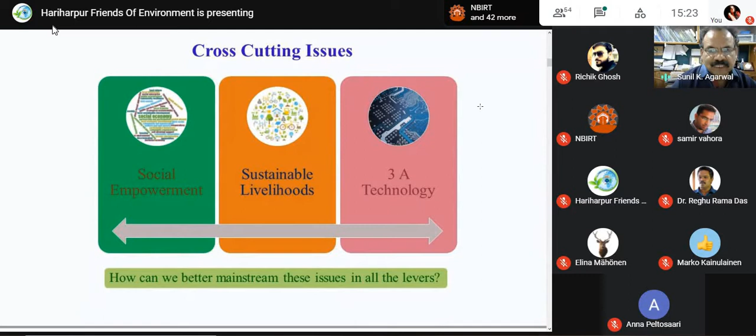These are the cross-cutting issues when we talk about social development or impact: livelihood, social empowerment, and 3A technology. When we talk about technology, we believe in appropriateness, affordability, and adaptability at the user or community level. We have to strike a proper balance among these three cross-cutting issues, and that is the purpose of the Science and Society program of the Department of Science and Technology, where we look at these cross-cutting issues in each and every project to benefit and empower the community at large through technology interventions.

So these initiatives are being taken under the particular scheme, the technological advancement for rural areas. This is a grant provided in a phased manner over 5 years, and they work to deliver need-based and scalable technologies at the grassroots level, focusing on better quality of life through action research, which may lead to social enterprise—not a pure enterprise, but a mini or micro kind of social enterprise, which can lead to income as well as improvement in quality of life.

And we have at present 26 such organizations across the country working under this program.

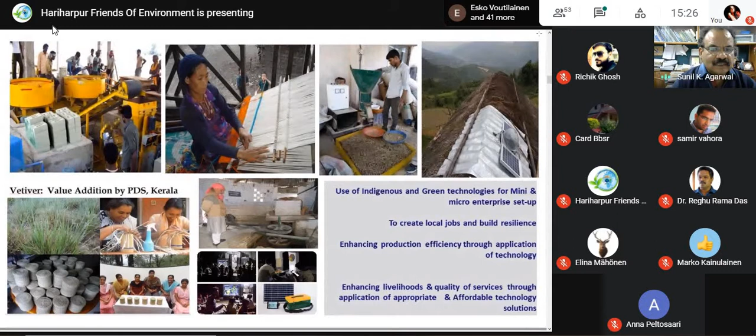On the right side you can see a micro solar dome installed in Manipur, and in the center a water mill from HESCO, who are working on water power and multi-purpose use of the water mill. At the bottom center is Barefoot College, based in Tilonia, Rajasthan—they have come out with a solar power Edu box, used not just in the country but outside as well. They have a network of 90 schools in rural areas where dropout students are educated using such devices.

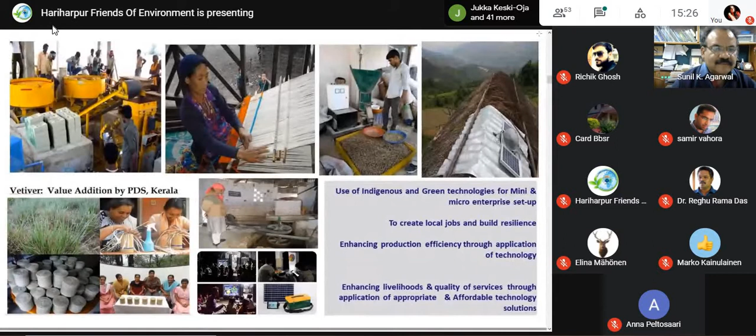Our interventions through this program are need-based technological solutions to address local challenges. These are some of the interventions carried out through a network of these core-supported organizations in the energy sector, biotechnology field, and other sectors as well.

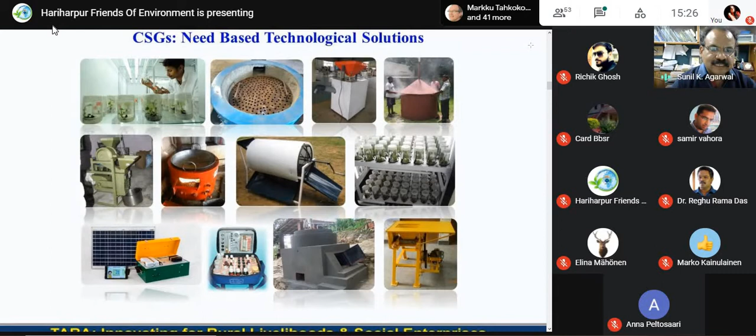In this slide, we have captured some technologies and products designed and developed by this network of core-supported organizations. You can find some related to energy—solar water heating system for mountain areas by Himalayan Research Group in Shimla, and solar tunnel by SPRERI based in Gujarat. We also have groups working on biogas systems at the community level, ARTI Pune, and another group working in Kanyakumari, Vivekananda Kendra.

These are the interventions which are in demand and which have evolved through the emerging need at the community level.

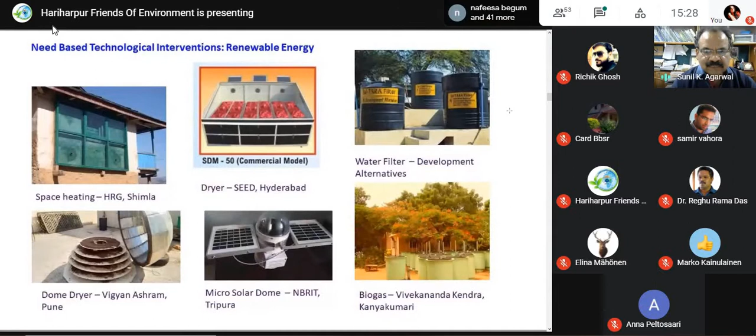This slide shows renewable energy interventions, particularly for space heating by HRG Shimla, and a dryer developed by SEED Hyderabad. This group in Hyderabad has developed varieties of dryers of different capacities for drying fruit pulp, making value-added products, and also processing minor forest produce into powder and even syrup. At the bottom is the dome dryer designed and developed by Vigyan Ashram, a core group based in Pune, and the biogas system from Vivekananda Kendra, Kanyakumari, mentioned earlier.

These are other interventions carried out by these groups. One group based in Bangalore, TIDE Bangalore, has come out with energy efficient cooking devices. And this is a micro solar dome designed and developed by NBIRT. These are efforts and initiatives which are need-based, addressing problems at the community level in remote parts of the country.

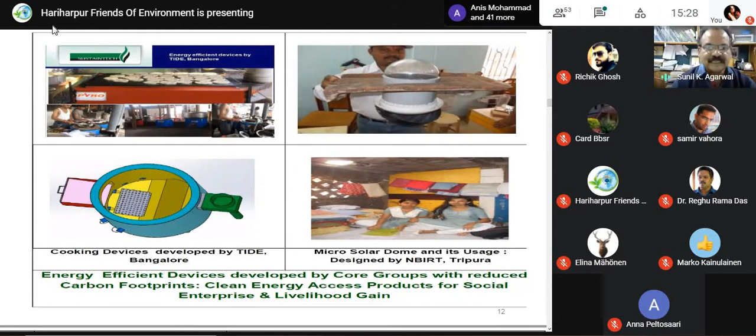I have also tried to capture some of these groups working particularly in clean energy solutions. On the left side are interventions they have done, and on the right side are innovative core groups working on renewable energy technologies. These interventions are also captured in our technology compendium, which we have put on our dsttara.in website, where you can source such technology interventions and the agencies who have designed and developed such renewable energy related products and technologies.

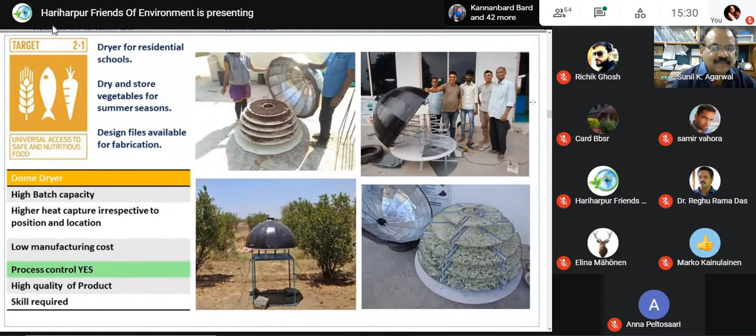This is the detail about the dome dryer developed by Vigyan Ashram. The beauty is that in a small space, the capacity is large, and this is mostly used for leafy vegetables and some herbal products to dry and make powder. These are interventions engineering-designed using the Fab Lab facility which Vigyan Ashram has, and such interventions are really in demand and being scaled further.

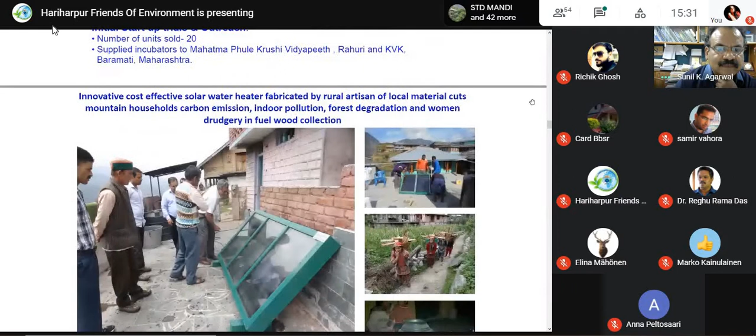In the same way, this is a very affordable product developed by the Himalayan Research Group in Himachal Pradesh, addressing the problem shown and providing income or employment to local artisans or fabricators in designing this double wall frame. It helps reduce indoor pollution, as shown on the right side. Traditionally they use fuel wood, with significant carbon footprint data. This eco-friendly device developed by HRG helps not only with water heating but also space heating, and has been captured across 6 districts as well as in the Ladakh region.

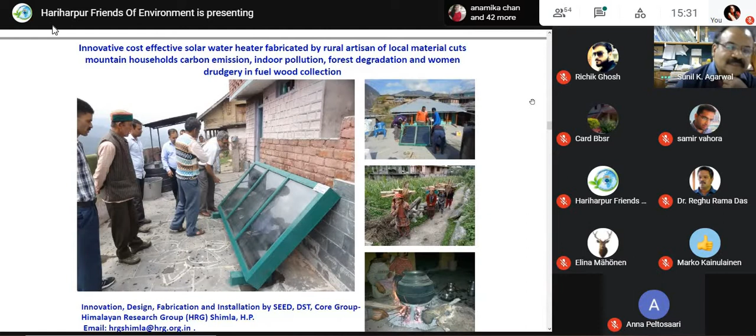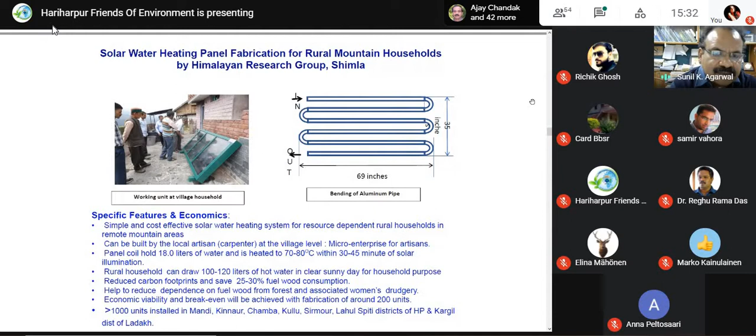These are the specific designs showing how it benefits water heating while reducing fuel wood consumption and women's drudgery. More than 1,000 units have been installed by HRG across different parts of Himachal Pradesh, and the state government is supporting this initiative. They received the State Innovation Award for this innovative work, which Mr. Risto also mentioned regarding solar waste innovation. This is one example in this process.

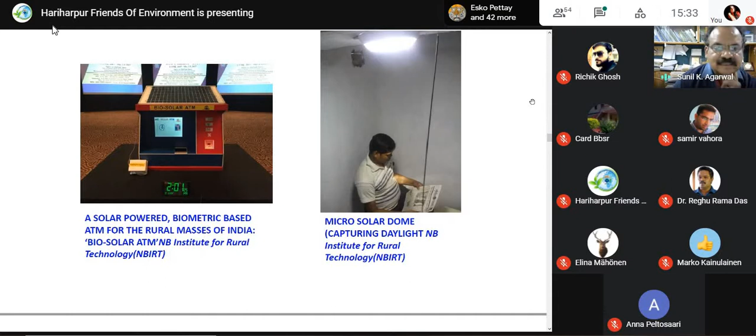There are other interventions from the NB Institute of Rural Technology, where Dr. Gaun Chaudhary tries to innovate and bring out one or two products each year. This is a solar powered biometric ATM, field tested and supported by DST, and now we are looking to get support from banking institutions for large scale application and adoption in other rural areas.

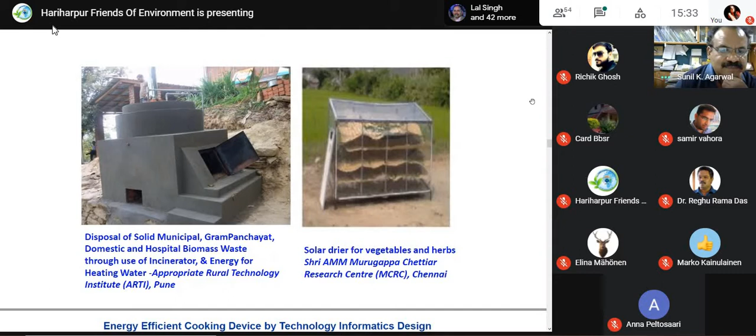What Mr. Risto was talking about, the energy efficient cooking devices - one group based in Bangalore is working on such devices and has come out with calculations for devices of different scales used in dhabas and restaurants. This has shown potential not only in reducing carbon footprints but also reducing drudgery involved in the process, along with clean energy solutions, in collaboration with IISc Bangalore. This is the technology evolution process involving knowledge institutions as well as science-based volunteer organizations, which we call core support organizations.

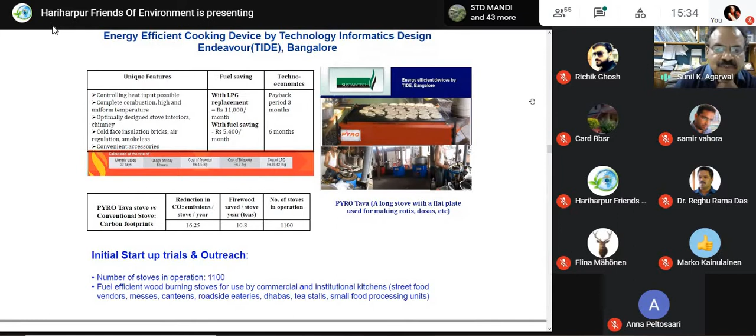So these are the products which have been designed and developed by TIDE Bangalore.

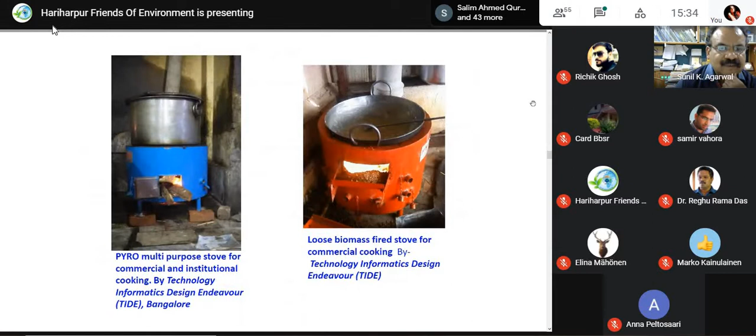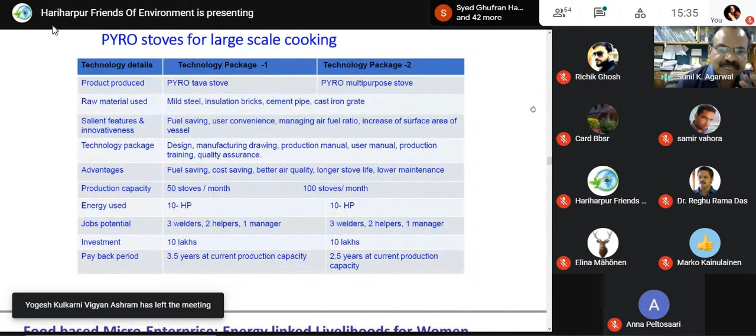These are some of the details of the packages in terms of investment, payback period, and advantage in fuel saving, cost saving, better air quality, and other factors like what raw material is being used. So these are some of the details which we have tried to capture for such technology products.

Besides such interventions, some groups, these core groups, have worked on the creation of micro enterprises, food-based enterprises, and have come out with varieties of nutrient fruit bars using the solar dryer by Seed Hyderabad. Another group, HESCO in Dehradun, has worked on mountain produce using the same dryer. So there is a technology flow from one organization to another, and they are working on local produce, with slight changes as per the climatic condition to control the inner environment for humidity or temperature.

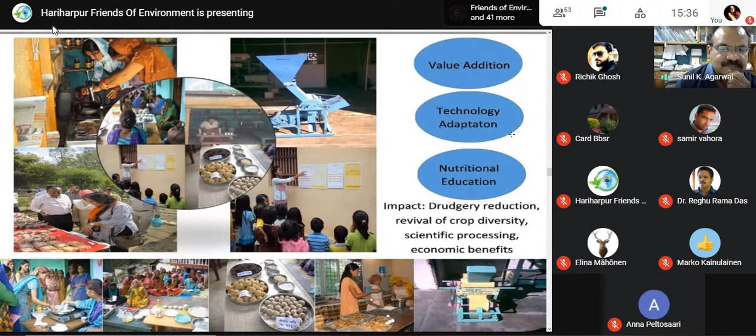So this is another case of Seed Hyderabad, where you can see the complete technology package, with details about the job potential and payback period of around 4 to 5 years. 200 plus micro enterprises have been created through such products, which is being promoted now by Seed Hyderabad, and they are really working on scaling such initiatives and efforts at the village level.

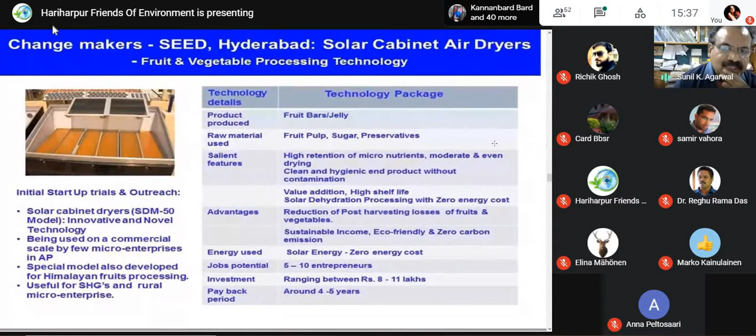So these are some of the details of these products, and they also have technology know-how, not just in India but outside India as well.

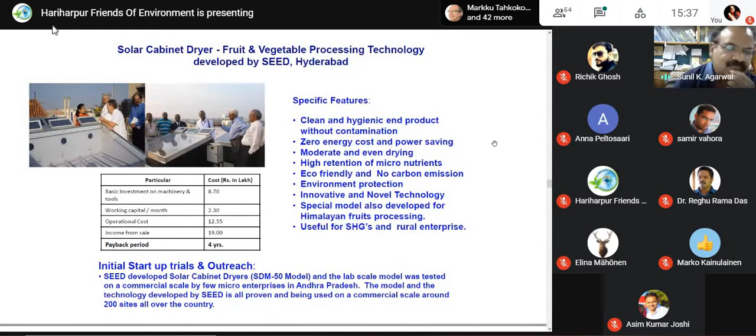Besides, there is some intervention carried out under the mountain program. We have a specific program, technology intervention in mountain ecosystem, and this is the product from YS Parmar University. They have designed and developed an indirect solar dryer for drying fruits and vegetables, specific to mountain regions, trying to control the conditions within these products including humidity and airflow.

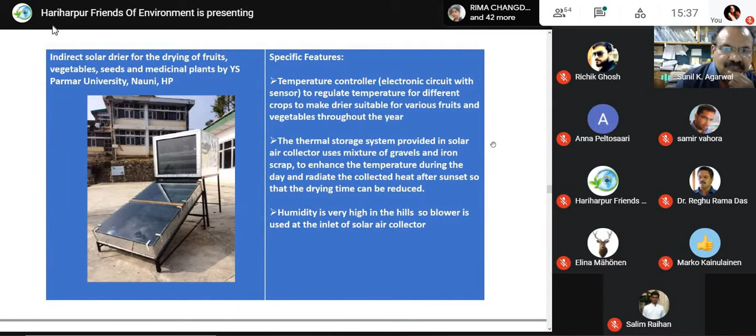So these are some of the specific features while designing this type of dryer for use in mountain areas, and it is easy to fabricate by local artisans. That is the real importance, how we can revive the artisans and their livelihoods.

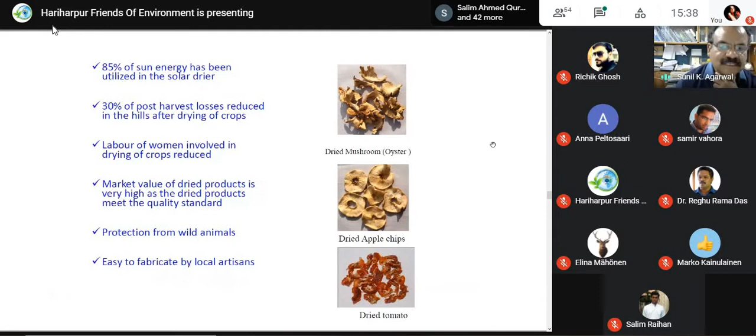There is another group, Development Alternatives, based in Delhi, with working areas in Bundelkhand and other parts of the country. They have also come out with green technological solutions in building material, paper recycling, and creating enterprises at the small and micro level.

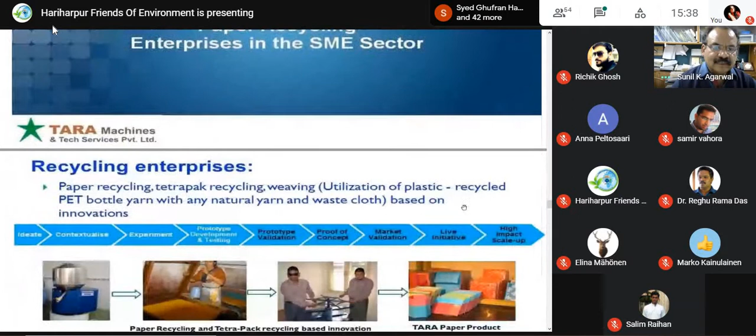And this is what they have come up with, a technological solution as recycling enterprises from idea to experiment. That is what all core groups are working on with the same principle: prototype development, field testing, proof of concept, market validation, and then high impact scaling up efforts.

They have designed and developed a paper recycling unit where they are using the solar waste drying system and making varieties of value-added products of different types and for different purposes.

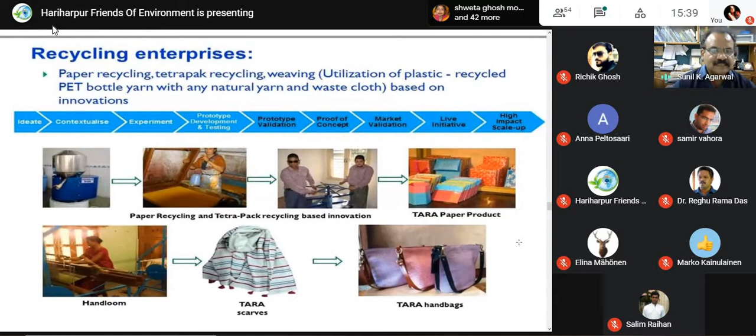And this is the detail about these packages, paper recycling and waste to weave. Two packages are there which we have been able to develop, and the payback period is given as around 2 to 3 years.

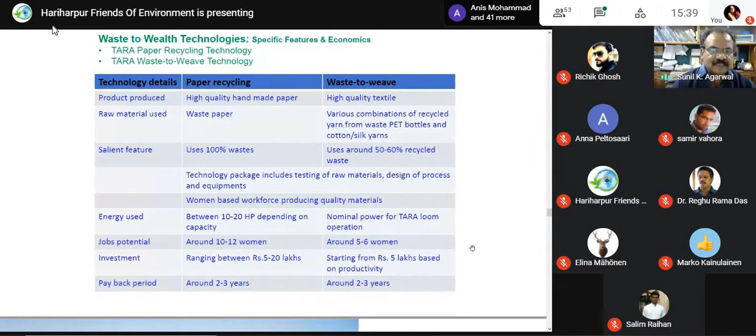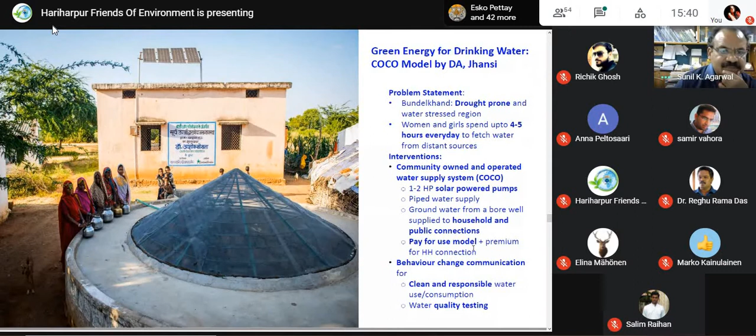And this is the complete working mechanism of such models for sustainable water services, with maintenance of the system by engaging the youth and women in the village system.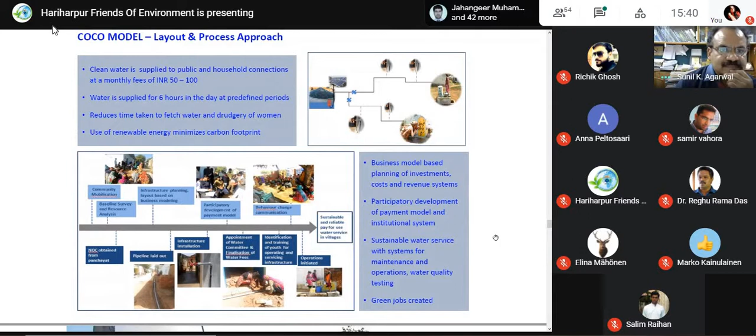So this is the kind of impact: 550 plus families are being benefited, engaging women and youth in income generation activities, as they are also involved in maintenance and repair of such systems, based on a payment system. This is really helping enhance the social impact and outreach of such technological interventions, developed and evolved by science-based volunteer organizations.

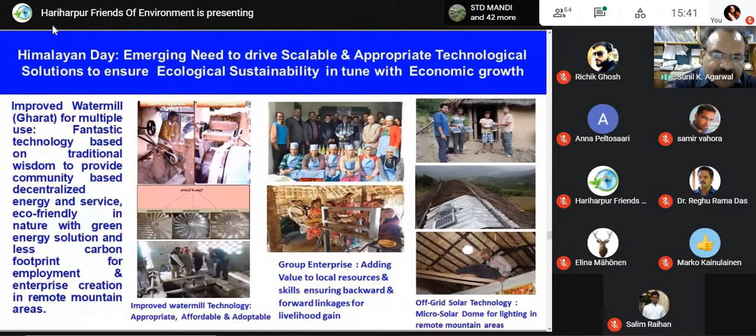This is about Bundelkhand, which does not have good quality of water, and we have other areas of intervention in the mountain area. These are initiatives in terms of water mills, designed and developed by one of the groups, HFOE, working on a variety of turbines. Another group, NVRT, has worked on the micro solar dome, which is being promoted and field tested in varied climatic conditions involving these core groups. That's the support DST provided to NVRT and other core groups so it is really catching up.

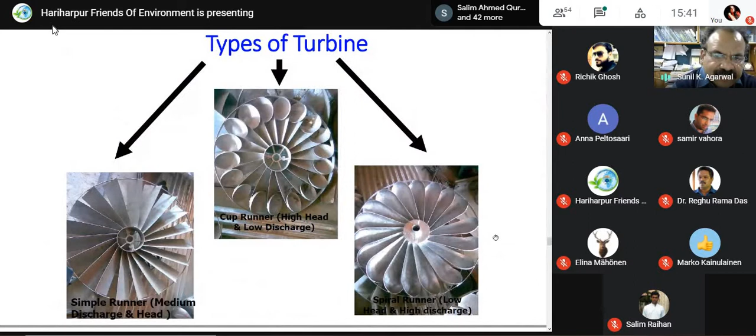And these are different types of turbines which have been designed and tested by HFOE Dehradun.

So how are we going to scale up such efforts at our level? We have one program around protected areas. These technologies - micro solar dome, water mill, or solar dryer - are being promoted through other programs around protected areas, engaging resource-dependent communities to provide them alternative livelihoods and reduce their dependency on forest resources for fuel wood or other purposes.

These are some of the interventions made through these programs, connecting the dots. Whatever interventions or technology products come from the core groups are being used in other programs for scaling up or benefiting the community at large in remote and rural areas, particularly around protected areas, of which we have more than 700 across the country.

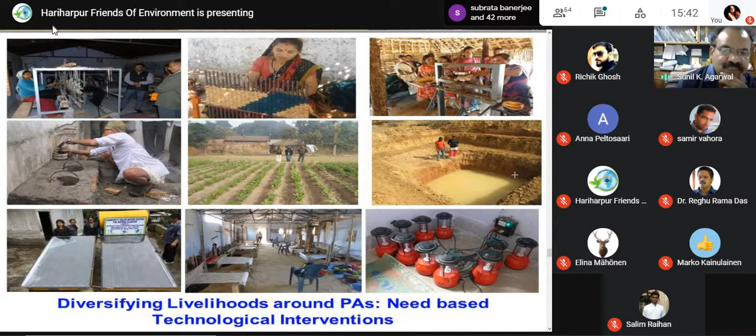So these are the social and environmental impacts through such initiatives. You can see reduced drudgery and reduced pressure on natural resources, contributing directly or indirectly towards climate change adaptation, and also addressing human-wildlife conflict. These are the joint modes of governance from understanding to action research.

In terms of technologies, this is the total impact of the program for the last 3 years, at the grassroots level, also addressing specific UN SDGs - these are SDG 1, 2, 3, 4, 6, 8, 10, and 13 for climate actions, and clean energy solutions, that is SDG 7 I think.

So this is the national footprint of these core groups. They believe in working collectively and also with the community, and they also act as a think tank at the local level, doing innovations to address local problems and challenges.

So this is the compendium which has been brought out, and you can see on the right side, the website dsttara.in. We have captured some of the technologies related to energy, agriculture, water, or digital technologies, which have been showcased in this compendium, available on dsttara.in. This website is maintained by one of the core groups, Vigyan Ashram, based in Pune. You can find details on the website.

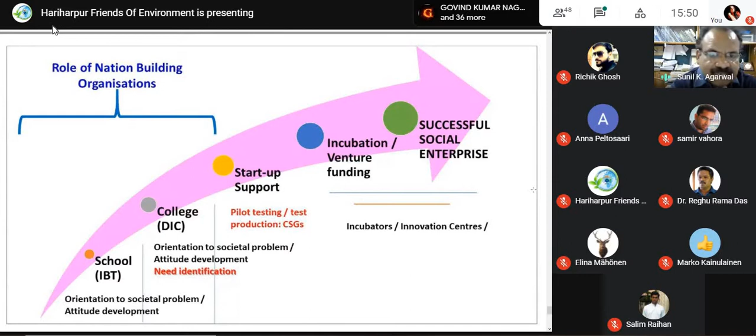The focus now is village-centric rather than city-centric growth, because India lives in the villages. We need to nurture the rural and social entrepreneurship ecosystem, and technology should move at speed with scale and sustainability, requiring collective action. That's what we're trying in this process. NVRT and InSIC are also trying for collective action, involving R&D labs and field-based agencies like the core groups and the community, for impact at the bottom of the pyramid.

Ultimately, what we look at is the impact and the smiles on the faces of the communities. This is one of the photographs we captured from the mountain areas in Kullu, showing the technology users involved in the process run by WWF India. This is, from our side at DST, to share some of the experiences we have in technological innovations at the grassroots level. So thank you once again.

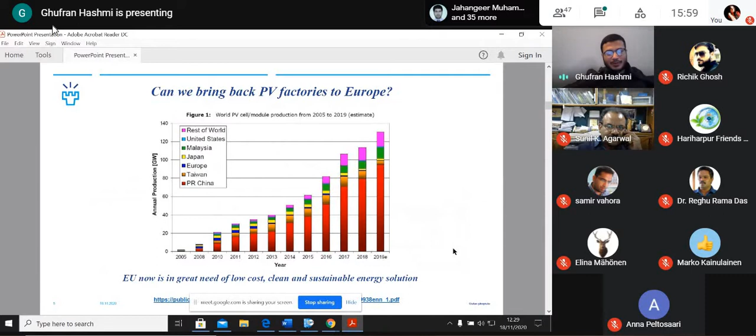When I posted this on LinkedIn, because I count that as a more effective way of getting citations rather than publishing an article and waiting until people cite it, this was the quickest way. It received massive attention, and almost 100K views were achieved in a few days, for a reason I'm going to explain, because a lot of people are working on perovskites.

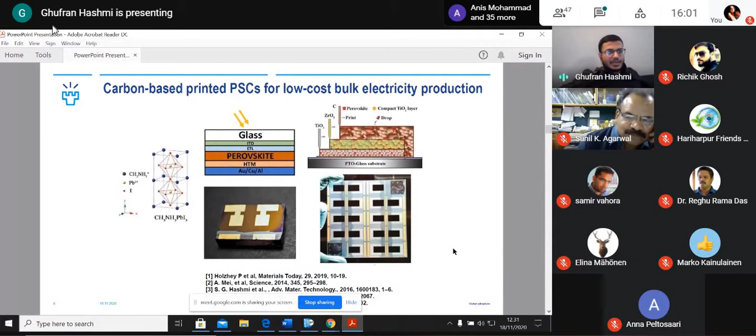However, we all know that perovskite solar cells can be fabricated into many configurations. There is an interesting configuration which I worked on dedicatedly, and I have been involved in developing it. Today I would like to share some thoughts about it, and the data which we have published. First, you take a glass substrate, and then you coat all these active materials by scalable methods, and then you can really have a device.

This first work related to this structure was that you just coat the electron transporting layer, then an insulating zirconia or aluminum oxide layer. Then you can print the abundantly available carbon nanoparticle based layer, which works as the hole transporting or hole collecting layer. Then from the top you infiltrate the perovskite precursor that goes through the pores, and when you heat up the substrate, it crystallizes.

But what was happening before my work was that people were manually infiltrating the perovskite precursor ink, and that was creating a huge problem, because in order to develop any new nanotechnology, you have to make sure you produce it with a highly reliable process control, meaning every active layer you deposit should be reproducible. For example, if you're adopting scalable methods such as slot die coating, inkjetting, or even screen printing, that allows the same amount of paste or liquid ink dispensation, so that in the end, when you fabricate any kind of module or batch of a module, it should give a reproducible result.

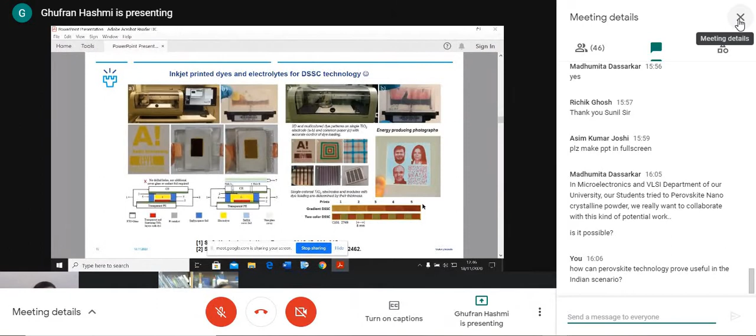Similarly, you can see these colors - this dye sensitization process, after coating the titania layer on the FTO glass, you directly dip it in the dye solution. Anybody working in this field knows what I mean. Then you grow a monolayer of this dye on the titania layer through the anchoring groups, so you cannot introduce multiple dyes.

Because in the larger spectrum, normal inkjet printers which connect with the computer have CMYK and RGB kind of cartridges. The active motivation is shown on the right side - there are 3 photographs, one of me and two of the co-authors. It is in only red color, and it's an active solar cell.

The motivation is, if we can introduce multiple dyes, can we generate something similar to digital printing? Can you produce a photograph as a function of a solar cell? That was the motivation.

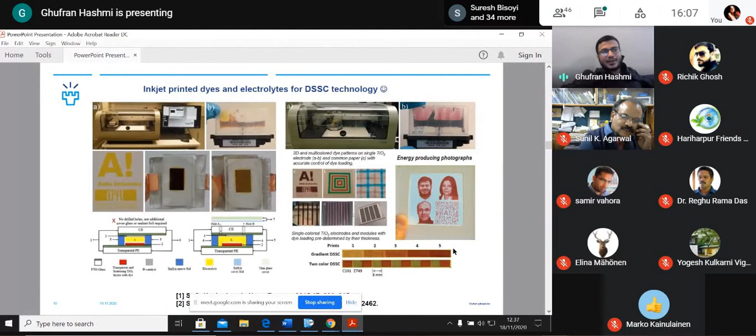We successfully developed a proof of concept, and that was the motivation to adopt this inkjet infiltration or printing of the perovskite. That went very successfully, and we were able to show a very tunable performance by controlling the amount of the lead halide perovskite precursor.

Not only did it improve performance systematically, but we also achieved an almost hysteresis-free JV curve, which is one of the major challenges in the perovskite solar cell field. So that was successfully established.

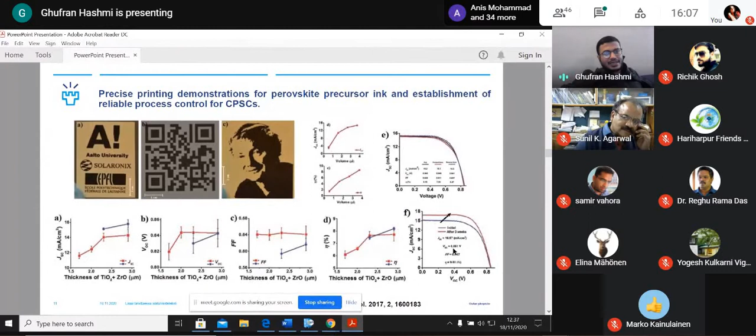More impressively, when we exposed the devices to thermal plus full sunlight soaking tests, without any encapsulation, the devices remained pretty stable. This was a few years ago, when everybody was trying to stabilize perovskite solar cells, so that was a very impressive result. This article remained highly downloaded for about 1 to 3 years.

And this work is also patented with a US patent application.

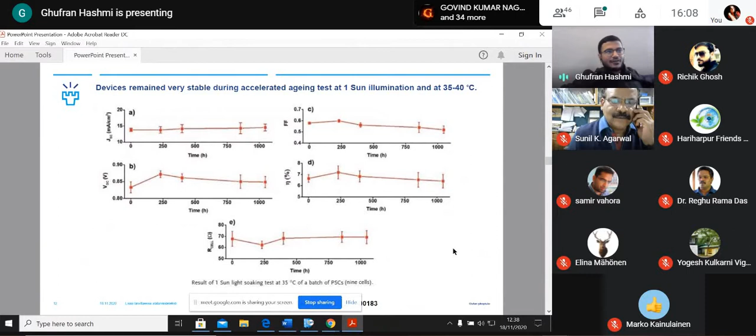With these impressive results, we moved to another stressful condition. We took the same devices, again without encapsulating them, and exposed them to very high UV stimulation, because organic photovoltaic technologies often suffer badly with the UV element in the sun's spectrum. One of the challenges is that every new technology, including this perovskite technology, should be very stable under UV light.

So without encapsulation, we again exposed the devices in a chamber where we installed very heavy UV, crossing 1.5 sun illumination. If you see the link in the article, you can go through what the conditions were.

When we exposed the devices for long-term stability testing, they remained stable under this stressful condition for 250 hours. After that, you can see a degradation in the short circuit current density.

You can see how these perovskite crystals appear black or dark brown. When they degrade, lead iodide formation occurs, so then you can see a yellow kind of color. That indicated that on this non-active area, and later on even in the active area, the moisture had penetrated and degraded the performance.

But even the devices remained very stable for 250 hours, and that is a very good result in this preliminary step. So how we planned that, you can see on the right, the JV curve was degraded for the same device when we measured it after maybe 6 weeks, or more than 700 hours. But it's still the results were promising.

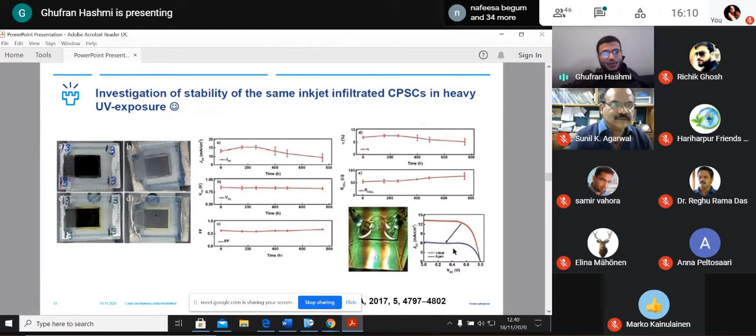So what we decided was to retard somehow this rate of degradation. What did we do? We simply took this normal epoxy available in the market, and we just doctor bladed this epoxy to cover all of this active area. And what happened then, we re-simulated the test, and we exposed the device in the same kind of conditions.

So as you can see here, for more than 6 weeks, it is a kind of standard test that is adopted from the advices or the consensus established for these organic photovoltaic technology testings. What happened is that the devices were not degraded up to this 6-week test. So it actually passed. This is one of the most stable research results in this field of perovskite solar cell technology.

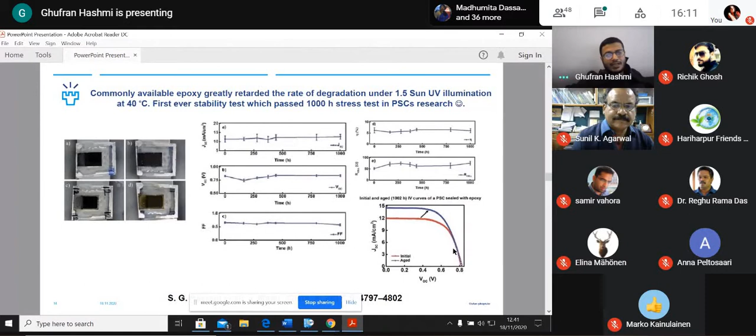And then what happened is that although you can see in this figure D the sign of the degradation was there, it was not reaching the active area. That's why not only did the devices remain stable, but the performance was also slightly improved. You can see the details given in this reference that is published.

So all these two preliminary stability tests were very motivating for us, and gave us extreme excitement. The same chamber was able to create a thermo-humid environment, because if somebody is following this field of perovskite, they all know that perovskite degrades rapidly in humidity and moist conditions. But our curiosity based upon these two brilliant testings led us to test the same device structure in this humidity-assisted thermal treatment.

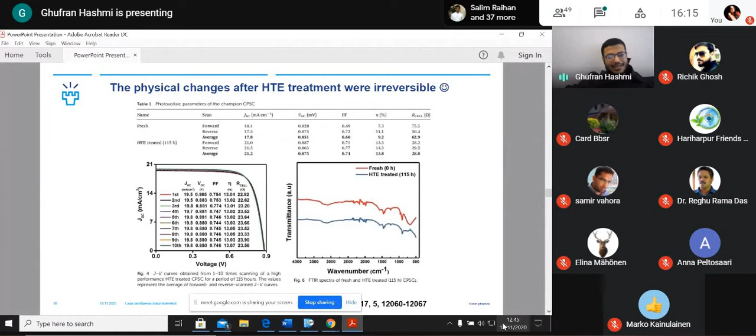It surprised me — how is it possible? So the first thing we normally do for this kind of crystal growth is the XRD measurement.

As a simple test, like in my previous slide — sorry, this one, I wanted to show this one. So what did I do on this surface of the carbon? I simply did a 4-probe measurement test to check what happened, because this is a nanoparticle-based layer.

So it happens that the sheet resistance could be changed. What did I do? I made a 4-probe measurement test where, without infiltration of the perovskite precursor, we measured the sheet resistance of this conductive layer at around 14 to 15 ohms per square. After infiltration, after crystallization of the perovskite, it reduced to around 10 ohms per square. That's understandable because it improved the interparticle connectivity. Then after the heat treatment, it was further reduced to around 8.5 to 9 ohms per square.

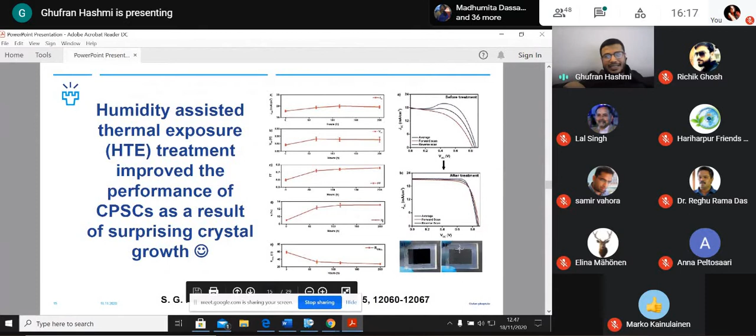But luckily, as I mentioned, a crystal came out at that edge, which gave me the idea to take some SEM images. You can see here the images of that edge. When the perovskite initially crystallized, it formed small chunks. Over the period of humidity exposure, they started merging together and forming these larger crystals.

So we were shocked, how is this happening? What we realized is that this carbon is hydrophobic by nature, so it repels the moisture created in this chamber. However, because it's a porous structure, it allows steam to go through and kind of kiss the perovskite crystals.

And what happens is, from the outer boundary, before fully degrading, they start fusing together with the neighboring crystal. And that's why they were turning into large crystals.

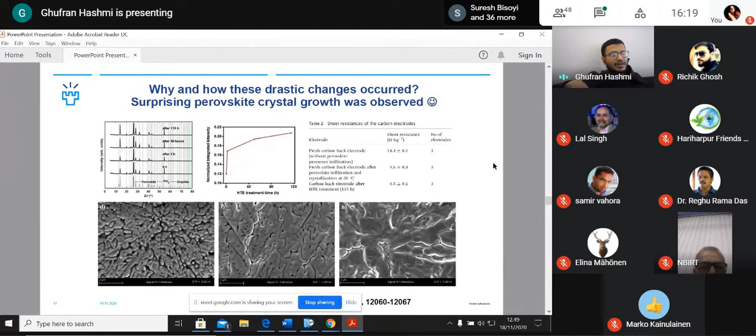This has given us a new discovery, because in all other structures you cannot expose the devices directly since they are just 1 micron thin, like the preliminary slides I showed. But in this structure, it gives us the liberty that this carbon is naturally hydrophobic, so it repels moisture, and you can keep the devices in high humidity.

When we tested the devices again for a long-term stability test, there was no performance degradation. That gives complete endorsement that these physical changes are not reversible, they are permanent. So this is a new way I figured out for the crystal growth, and that can lead to further improvements.

What was missing in the previous literature is that people mostly report four parameters: short circuit current density, VOC, fill factor, and efficiency. However, there is another parameter called cell resistance, because my structure is about 15 times thicker than the traditional one.

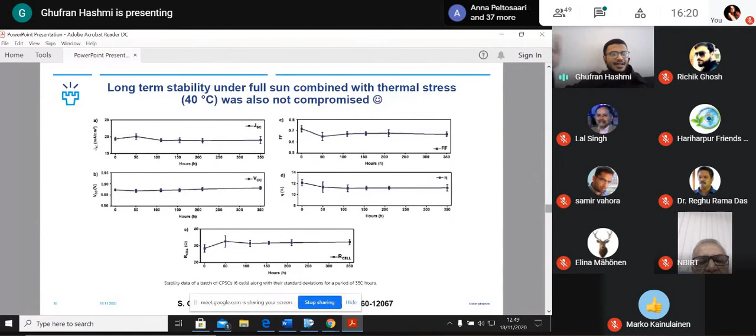So without going into the science, the principal characteristic it offers is high cell resistance. One of the challenges was to reduce the overall cell resistance. And how to reduce it?

This physical crystal growth improves the structure and interface, and now it is possible to reduce the cell resistance by up to 50 times, which is an impressive thing we achieved.

Since my last talk at InSIC, we have scaled up this technology successfully over a 40 by 40 glass substrate. You can see the device performance on a 20 by 20 square centimeter substrate, with an active area of more than 230 square centimeters. These are just some initial trials.

You can see a hysteresis-free device with a very impressive 7% conversion efficiency. And you can create a serially connected device to achieve nearly 11 volts, which is huge, because all these electronics these days operate on 5 volts.

You can see an amazing thing, that it's a very low cost production process. So the idea is, based on the spirit of promoting energy research in rural areas, to establish a low cost photovoltaic factory as a role model.

A lot of companies got excited within Finland, so they have been collaborating enormously, providing their facilities when needed. We have successfully filed many patent applications around this technology, and we are trying to convert it into a reliable product.

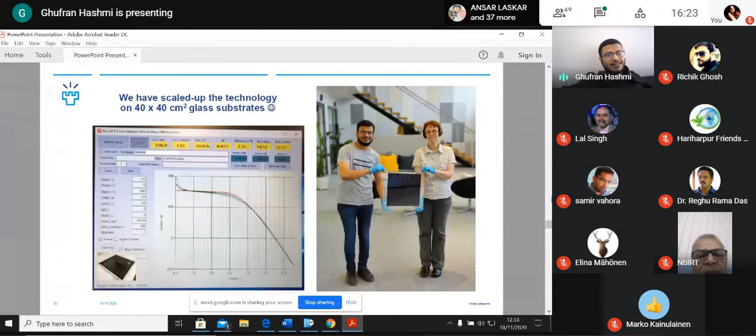So I have this dream, because this technology has the potential to generate a lot of socio-economic impact, and with that I am also very ambitious to hold this trophy.

Maybe it sounds funny at this time, but you never know. So there are some success stories around this kind of perovskite technology.

For example, Professor Henry Snaith from Oxford University has recently received the most prestigious photovoltaic prize, the Becquerel prize. And then there is Saule Technologies, which has emerged producing this perovskite technology, because as I mentioned, this perovskite cell can be fabricated in many device configurations. So they have adopted to produce it on flexible substrates, which gives more flexibility to install.

And then there is also a Swedish firm called Exeger. It is not directly perovskite technology, but the dye-sensitized technology. They have recently received funding of around 20 million from SoftBank. So there are successful stories.

That is motivating me to push this to the next level. And with that, I end my talk.

This was the exhibition that was staged very recently at Aalto University. And now I'm building up my lab, which is almost ready. I'm starting my team from January with 2 PhD students.

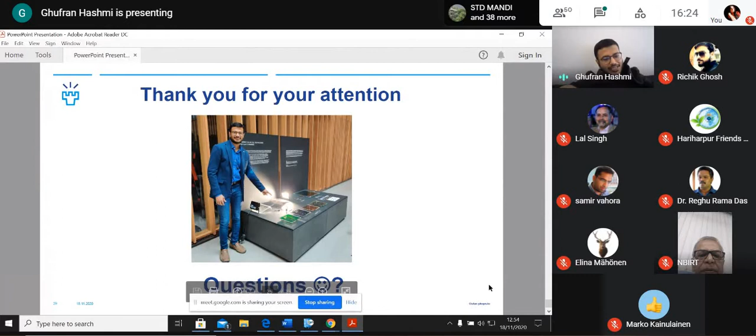Okay sure, yes please. The first question is from Professor Das Sarkar from WBUT, a university at Kolkata, India. She is saying that in the microelectronics and VLSI department of her university, students tried to make perovskite nanocrystalline powder. They really want to collaborate on this kind of potential work. Is it possible?

Sure, why not? A lot of things are possible because I know a lot of people are trying to create even single crystal based perovskite crystals. So of course a lot of things are possible. I'm very open, there's no problem, if somebody comes up with a good idea and even some kind of joint funding.

There should be some kind of joint funding, because effective collaboration could be through that. For example, there are Swiss fellowships, and a lot of Indian students go to Professor Grätzel's lab through that fellowship. So if you have this kind of opportunity, people could come to Finnish universities. I would love to host any PhD student, there is no problem.

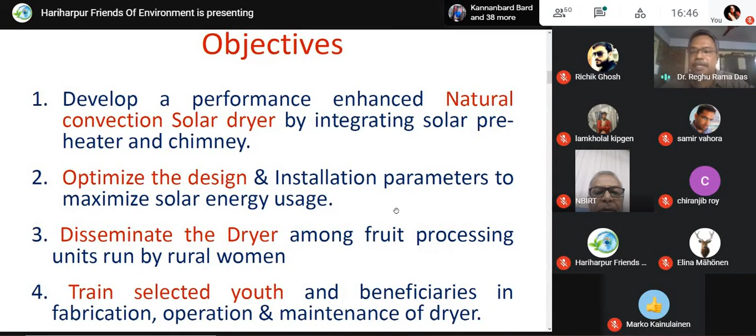The specific problem is that we have plenty of natural resources available for processing, especially fruits, tuber crops, spices, and coconut, mostly available during the season. So during the season, a lot of fruits and vegetables get wasted because there are very few or no processing facilities at the village level. In the case of jackfruit, almost 50% of the fruits are getting wasted during the summer season.

Another problem is open sun drying, which is the cheapest method, but it is not hygienic and affects the quality of the products. This is the traditional method followed by people in the rural areas.

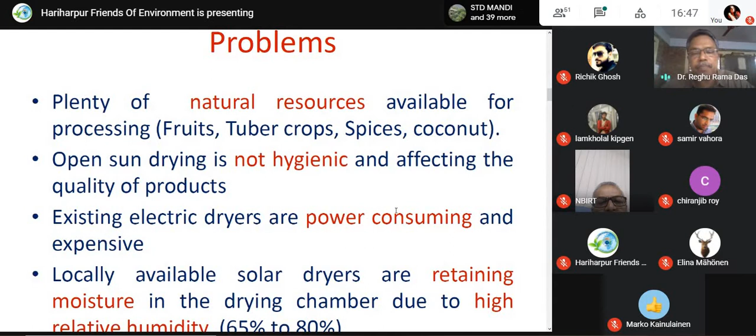The existing dryers are energy intensive and power consuming, and also expensive, which our village women can't afford. The problem with locally available dryers is that they retain moisture in the drying chamber due to high relative humidity in the area. Especially in Kerala, the humidity is very high - the project location is always raining and high humidity is recorded. So due to fungus attack and such, the shelf life of the products is very, very less.

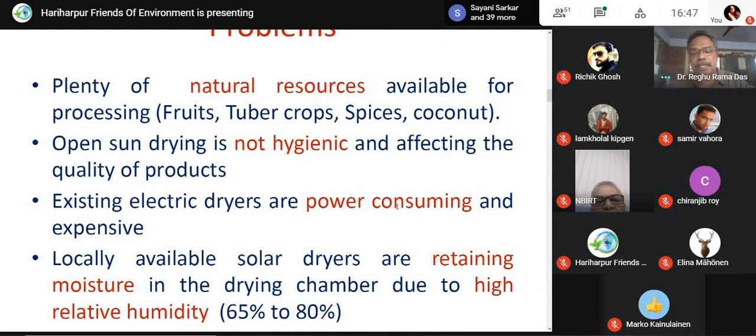So the demand or need for the technology is to utilize the perishable natural resources through dehydration and preservation, and to improve the quality of products produced by the women at the villages. To improve the quality, we need better drying and preservation facilities. Ultimately, the aim is to increase the income of rural women who run processing and value addition units. The availability of suitable dryers is very low, and also very high cost in the area.

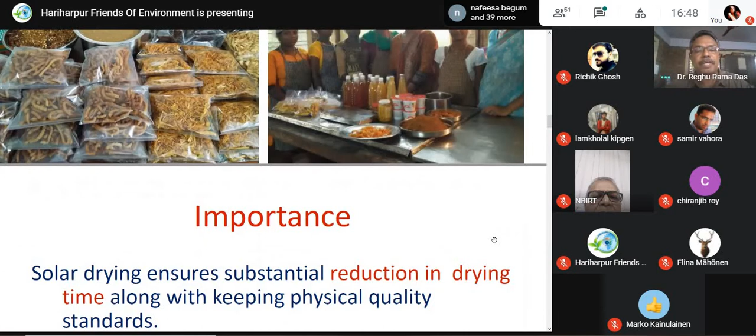The photos are of the women we have trained, with their products - some fried and dried products you can also see. Over the last 3 years, we have trained almost 200 plus women in processing of jackfruit and other locally available fruits and vegetables. Raw materials are available cheaply, so we should provide facilities and technologies so they can value add this product, market it, and generate income.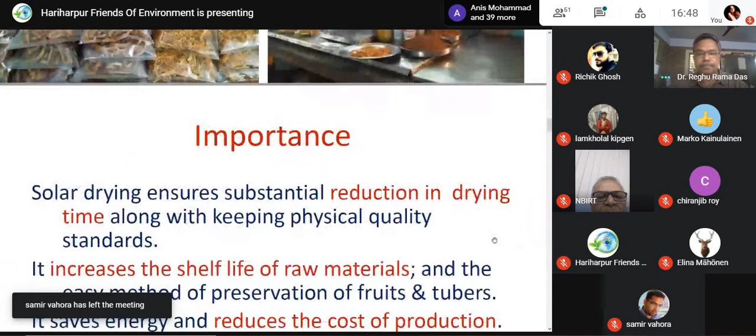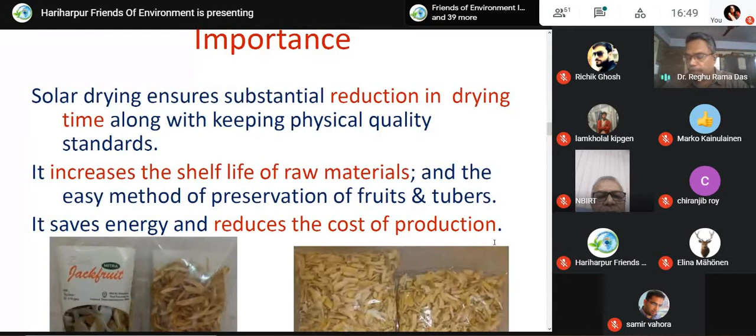The importance of solar dryer is that it ensures substantial reduction in drying time, which is very important, along with keeping the physical quality standards of the product. Primarily, solar dryer increases the shelf life of raw materials, and is an easy method of preservation of fruits, tubers, and vegetables. It saves energy and reduces the cost of production since there is no recurring cost. These two photos are dried jackfruit, which can be soaked and cooked as vegetable or fried as chips.

The technology gap and solution in relation to this drying: in Kerala, the relative humidity is very high, varying from 65% to 80%. So solar drying without proper airflow will lead to retention of moisture in the drying chamber. This is the main technical problem we are trying to address through this project. It affects the keeping quality through fungus attack.

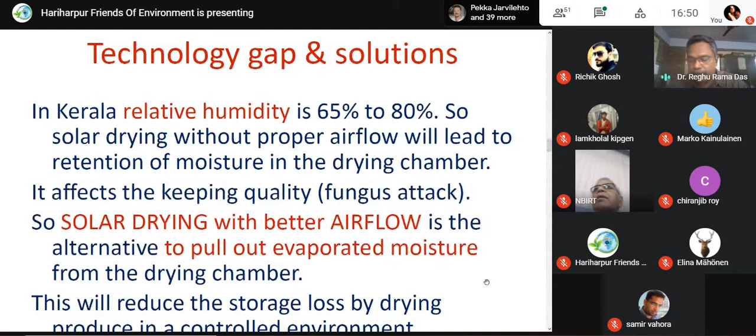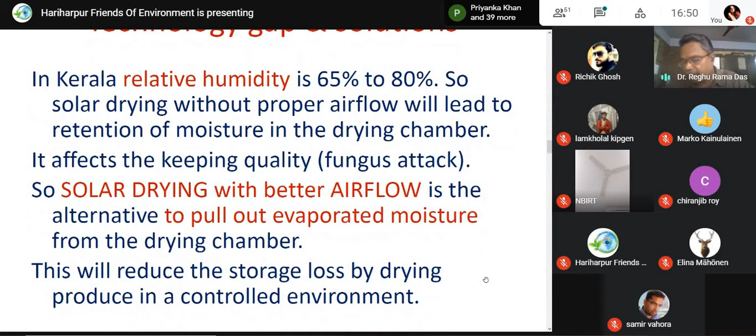So solar drying with better airflow is the alternative to pull out evaporated moisture from the drying chamber. This will reduce storage loss and post-harvest loss by drying the produce in a controlled environment - that means drying in an enclosed structure with proper airflow. This can save a lot of post-harvest loss.

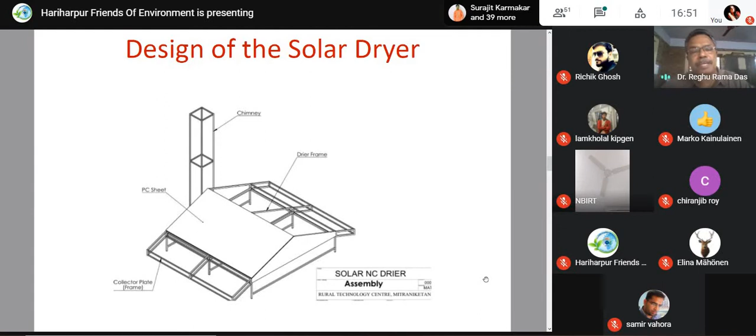This is the design we have developed, the first design of the solar dryer. You can see the solar inlet, that is this solar collector, then the collector is covered with the polycarbonate sheet, and the chimney which has been added, that is the uniqueness of this project. The dryer frame primarily consists of a preheater with the collector plate close to the air inlet on both sides of the dryer. Then drying chamber, chimney, polycarbonate sheet, UV stabilized sheet, and the drying area of this dryer is 4 meters square, meaning we can load 4 trays of 1 meter square each. Capacity of this dryer is about 10 to 15 kilograms depending on the product. I will explain this in detail in the next slides.

We just started initiating the prototype. The work is just on. We have started producing, it hasn't reached the stage of testing yet, but the work is ongoing.

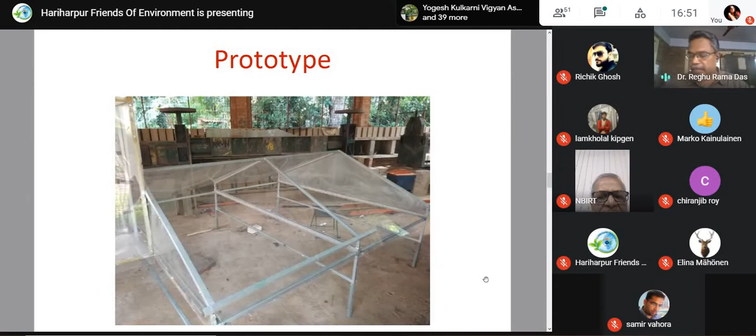I'm now explaining the components of the dryer. The first one is the preheater plate, which is a collector. It heats the air coming through the inlet before entering into the main drying chamber. There's preheating of the air incorporated in this dryer.

Secondly, you can see the drying chamber. As I mentioned, there are 4 trays, and it is 4 meters square. Then the chimney, which is the main addition and uniqueness of this particular dryer. The chimney helps for a better air speed by free convection and homogeneous distribution of heated air inside the drying chamber. The hot air rises and escapes through the chimney, while the cool air at ambient temperature enters through the lower inlet into the preheater. Therefore airflow is maintained, and the chimney increases the amount of airflow.

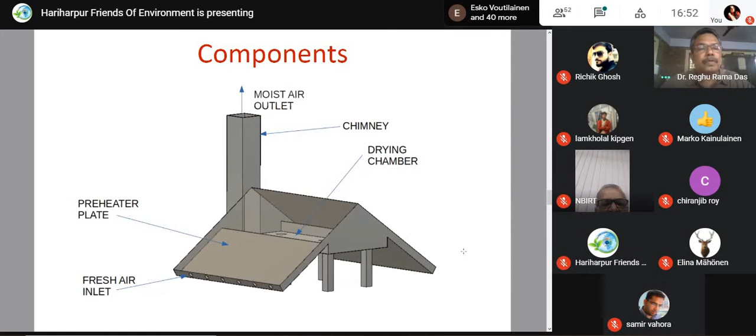So I will explain now about the different components. The preheater is a flat plate collector with a transparent top and darkened substrate to tap maximum heat. These are attached to both sides of the dryer connected with the inlet region. This can be detached, especially when drying the products inside the dryer.

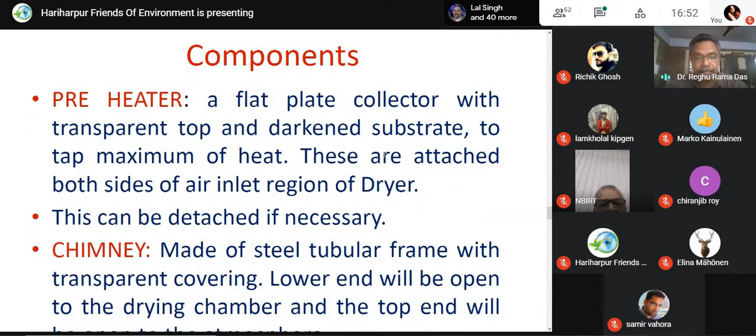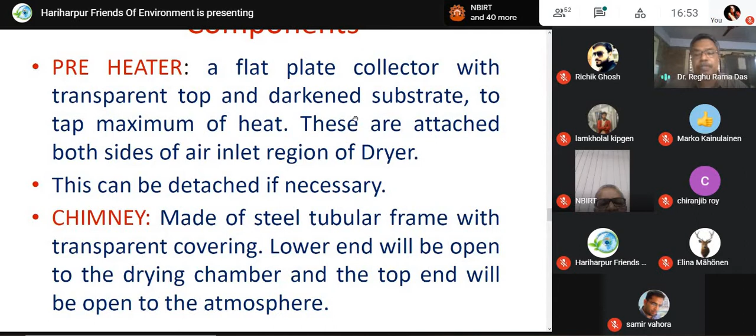Then the chimney, as I explained, is made of a steel square tube frame with a transparent covering. The lower end of the chimney will be open to the drying chamber, connected with it, while the top end will be open to the atmosphere, like in other chimneys.

About the drying chamber, it is made of stainless steel square tubes covered with transparent UV protected polycarbonate sheets. We use mainly plain sheets, so that will radiate more heat inside the chamber. Then as far as the drying trays are concerned, it is made of aluminium with thermal insulation provided at the bottom, and the top surface of the tray is blackened to improve heat absorption.

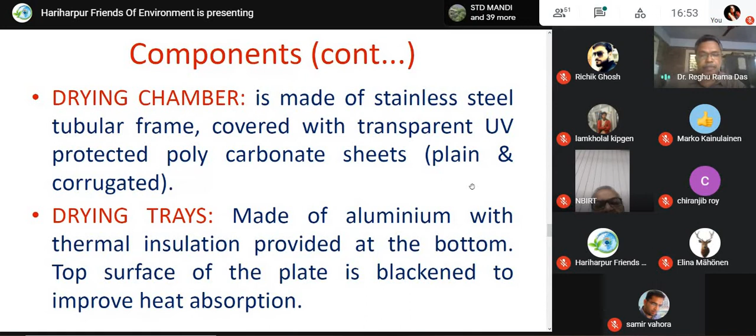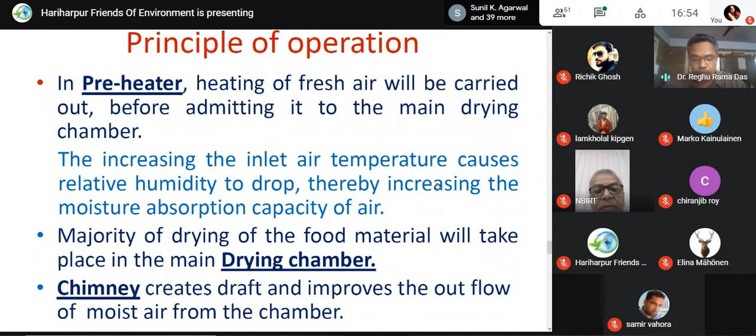As far as the principle of operation is concerned, in the preheater, heating of fresh air will be carried out before entering it into the main drying chamber. This is the main addition we have included in this design. Increasing the inlet air temperature causes a drop in relative humidity, thereby increasing the moisture absorption capacity of the air. Majority of the drying of food material or fruits takes place in the drying chamber itself. The chimney creates draft as well as improves the outflow of the moist air from the chamber. This will definitely help fresh, dry air to be introduced into the chamber at an accelerated rate. This is the principle of operation of this dryer.

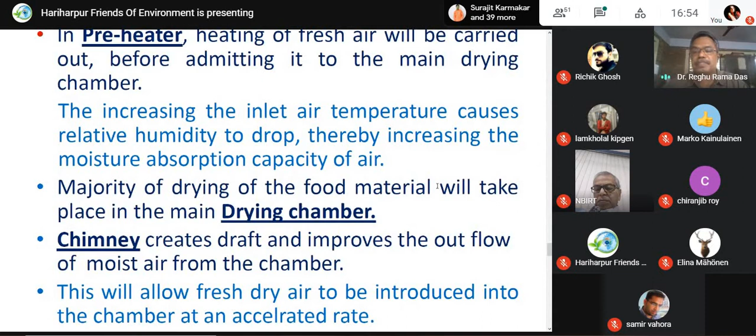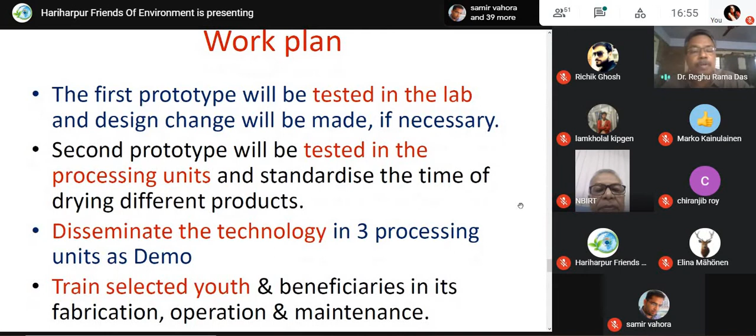The work plan: we have just started developing the first prototype. This will be tested in the lab, and if necessary, design changes will be made. Then the second prototype will be tested in the processing unit, as we have 4 jackfruit processing units functioning in the villages. Then we will disseminate this technology to 3 processing units as demo units. Next, we will focus on training selected youth in skill development for its fabrication, and orient beneficiaries in its operation and maintenance.

We developed some fortified baby food from banana powder. So for drying banana, this solar dryer can also be used.

This is the work we have done so far. We initiated the project on October 1st. By the end of December, I hope to complete the first prototype and do trial testing using different fruits in the lab itself. Then I will get back to you with the data. Thank you very much, if you have any questions please.